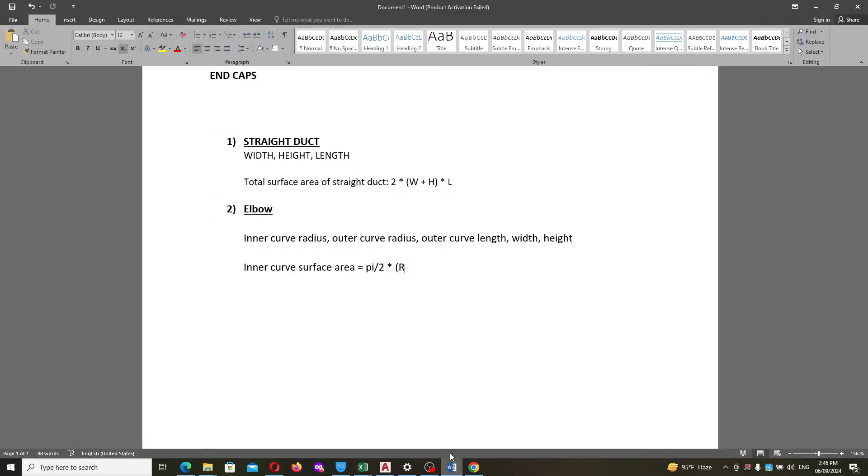So let's get started. First of all, we open the Word file. We will make a new Word file here.

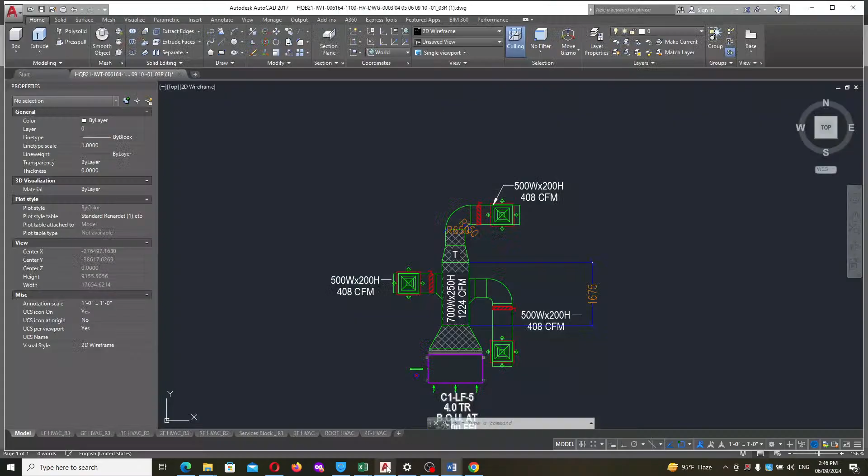Before that, there are many types of ducts in HVAC systems - rectangular, oval and round type, using sheet aluminum or carbon steel in different categories. But today we will focus only on rectangular duct and GI, galvanized iron ducts, because it's the standard normally used in HVAC industry. Other materials like carbon steel and other ferrous materials are used in industrial applications, which we will discuss later.

So you may think, for duct measurement, why are material and these things important? We'll discuss this further in this video, because when choosing the right thickness and choosing the material, we need all these details.

When we go further, we need more details related to SMACNA. We need to get those details from the SMACNA standard to select the duct. Normally in the Gulf area, or I think almost every area, they use the SMACNA standard for HVAC duct.

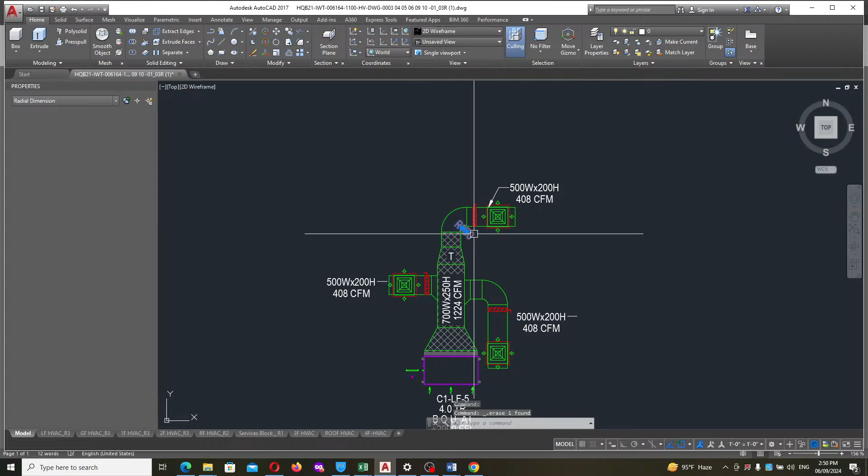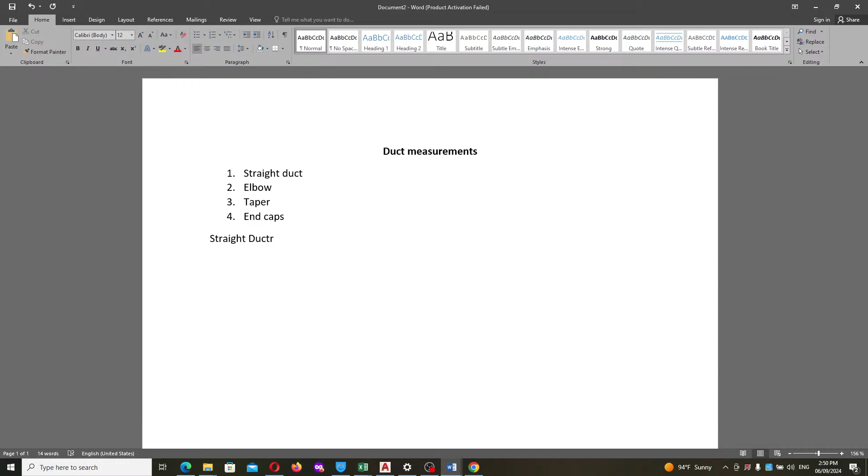So we are going to the Word file. We need now all these equations. First of all, we are going to straight duct. What all details do we need?

We want the width, we want the height to get the straight duct measurement, we want the length. These three things we require to find the straight duct measurements.

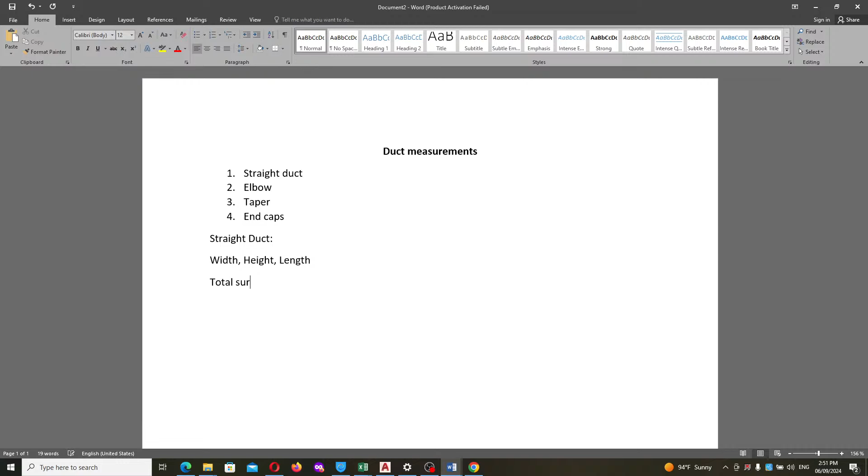So we'll go to the equation. We want the total surface area. So what will be the equation? We need to get the perimeter.

So how do we get the perimeter? We need to put width plus height. So we are able to get perimeter into length. So this is the total surface area equation, the formula for the straight duct.

So next we are going to apply this to the Excel sheet. Before creating a new Excel sheet, we'll go to some template. We'll find some template from MEP Work. We are going to open MEP Work templates.

So here we can find related documents. Here we download the HVAC duct measurement Excel sheet. So we are downloading this.

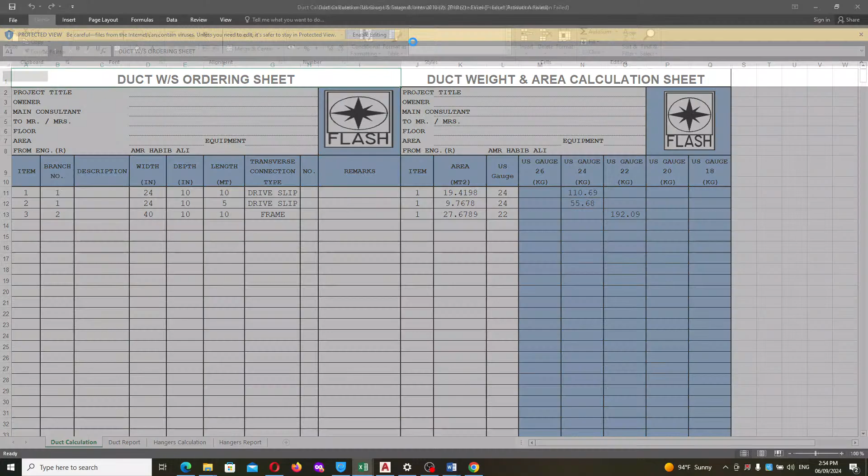So we got the Excel sheet. This Excel sheet I got from mepwork.com. This Excel sheet already has equations and everything - they put their own equations. You can see the depth, width, depth, length, transverse connections, area equations, US gauge selection.

That's why I told you, for this gauge selection we need SMACNA standards, and for the kilogram calculation that's also required. But what I'm doing is we are not using this Excel sheet - we will make our own custom made Excel sheet.

So what we'll do is delete all these things, we don't need this anymore. We just use this template for easy use. So in width I will put in mm - it's currently in inches, we don't need inches, we will use mm only. So leave it, this column we will not repeat.

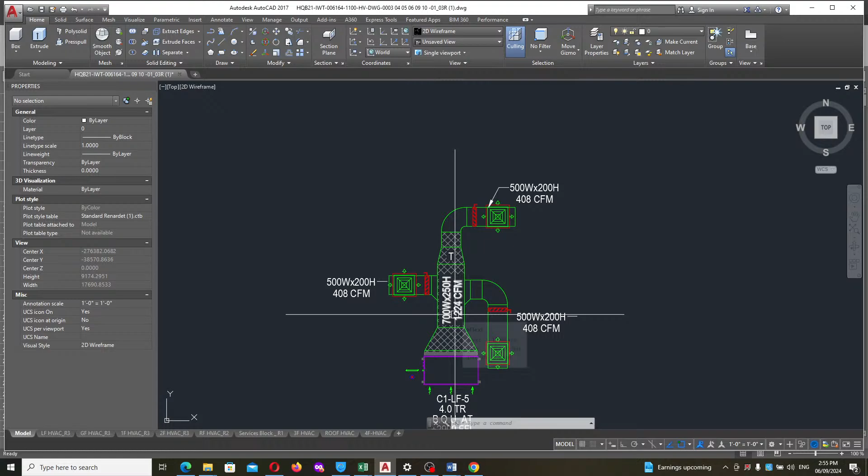So first of all we're discussing the straight duct. We have width 700 and height 250. So I will feed these here, 700 and 250 height. And length we need to take from AutoCAD. How do we take the length? We need to use the command DIM.

When using dim commands, we will get this is the length of the duct, 1675. That I will put here, 1675. So these are we got, these things are we got.

Now we know the equation standard formula. So what is the formula? 2 into width plus height, that into length. So this formula we will put there.

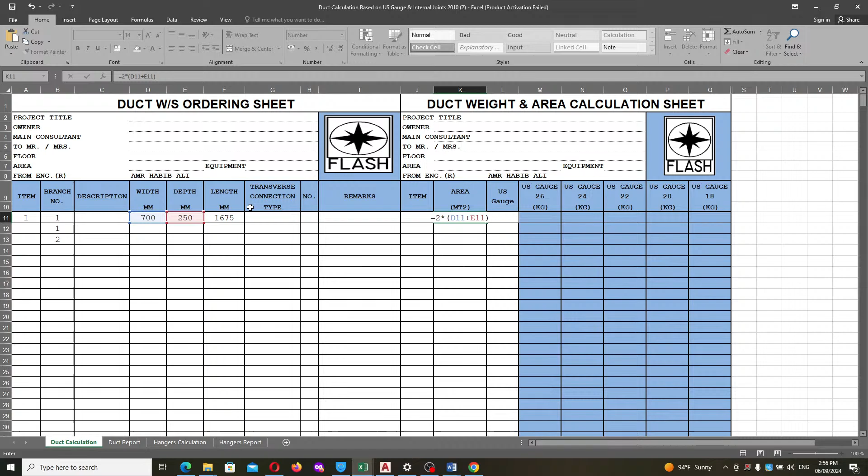So how we will put? We will put equal sign, then we will put 2, then into, then we will put one bracket, then we will select the width row, then we will make plus, then again we select the depth row, then bracket will close, and into we will take the length. So we got a big value.

So we got mm square. But we don't need mm square, we required the area in meter square. So what do we need to do? We make another bracket. We will divide by 1,000,000. So 3.1825 is the area of that straight duct.

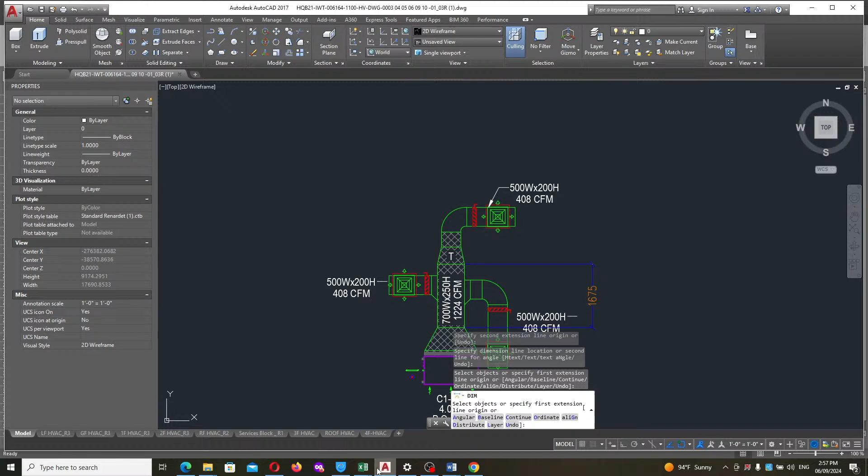So straight duct is very simple, right? So straight edge is very simple. Next, what else? We will go to the elbow. When we go to elbow, it is a little difficult, a little more complicated than straight duct. It's not easy like that.

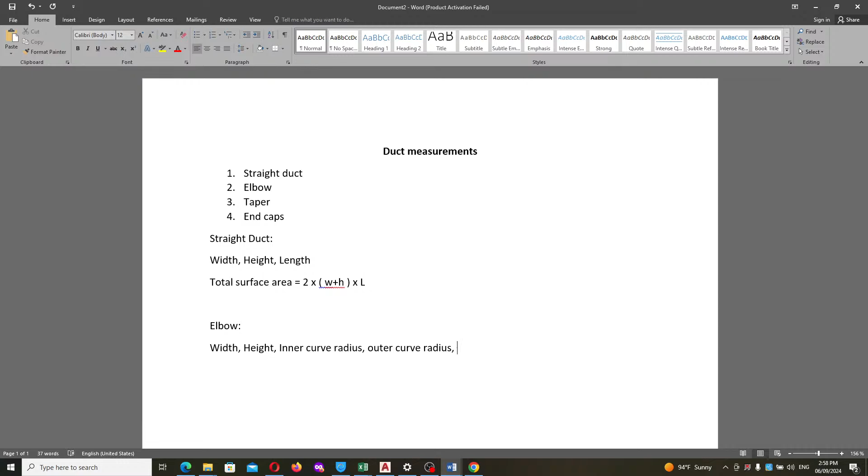How do we find the elbow? So elbow, how we will get it? There are many things you have to add. We need a width, we need a height, we need an inner curve radius, we need an outer curve radius. Then what we need? We need an outer curve length. These things we need for calculating and measuring the elbow.

Maybe you don't understand what is inner curve. I will show you in AutoCAD. In AutoCAD, this is our elbow. This is a 90-degree elbow, horizontal elbow. So in this case, we will tell how to get it. This is the inner curve, this is the outer curve, and this is the outer curve length also. From here to here is the outer curve length. These three things we need to find.

And the width and height we already have here, 500 by 200. So how do we get this? There we use the command dim rad. So we will get the radius. So when we select this, we got the radius. So 150 is the radius of the inner curve.

And what else we need? Outer curve radius we need. So what we need to put? Again we will put dim rad, dim rad, so go select this. We got this one. What is that? 650 is the outer curve radius.

So in this case, we need to make three equations. What is that? One is outer curve surface area, right? Next is inner curve surface area.

Next we need a... okay, next we will discuss. So outer curve surface area, how we get? We need an angle. Outer curve surface area we need to make. How we will make it, I will tell you.

So this is the outer curve surface and the inner curve surface. Here we use pi by 2, because this elbow is a quarter of the circle, so we can use pi by 2 into r outer. Okay, then what else? Into height. So this is the outer curve surface area.

Same we will put here, inner curve surface area. The radius will be inner. So this we got.

Okay, next, we already got this surface area, this surface area. We need this face and the bottom face. So top and bottom face, top and bottom face surface area. So how we will get this?

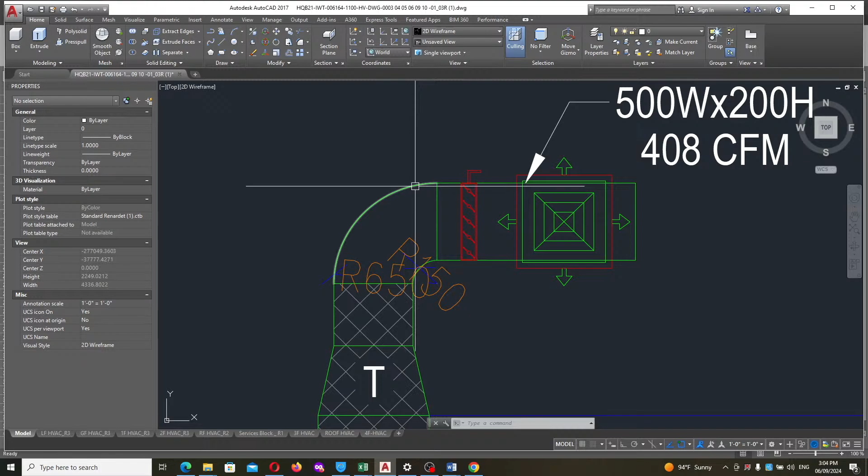So we'll use the length, we will take as the outer curve length. So what I want to do here, in this area we need to get, so we will multiply by 2. Both sides we have upper and bottom, that's why I multiply by 2. Then what we need to do, we want the width, we want the outer curve length, we'll put out. These equations we want to get.

So how do we get outer curve length? Outer curve length, how will you get it? You want to know that also now? Outer curve length we need to get: pi by 2 into r out. So we will get outer curve length.

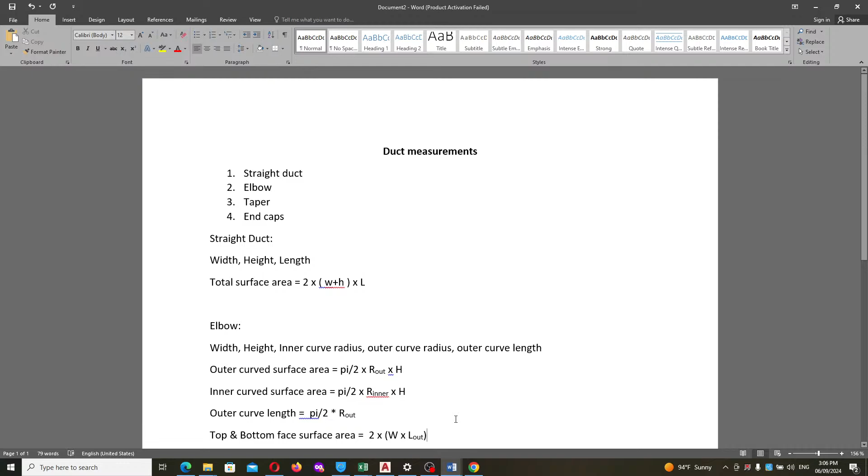So I think it is okay. We'll go to the Excel sheet and make the same Excel sheet.

So next here we put straight, here we put elbow. So what, is the elbow width same? No, elbow width is 500 by 200. That we will add here, 200.

So in this case, what length will we put? We will put outer curve length. But we cannot put that directly, we need to make equations. So no need to put a length directly in the Excel sheet, don't worry, that we will make with equations. So what else?

We need equation for this, we need to make equations. So we will make equations. We will make it equal, and first of all we want to put one bracket. We have the equation here.

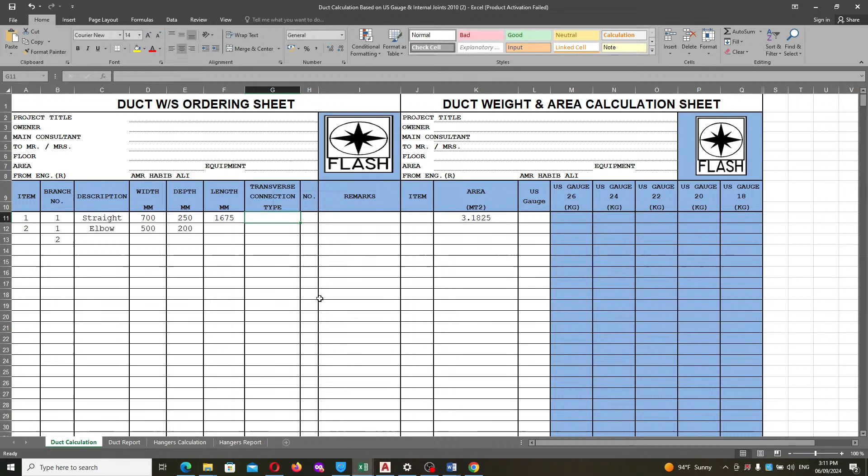Anyway, better we put extra columns. No need, we can put extra columns. So here we will add, this is for elbows only, this is applicable for elbows only. R inner, inner radius, and outer radius. These both things we need.

So for the inner radius, what was that? 150, right? And outer radius 650. So I think we can make the equation.

So now we put pi divided by 2, then we will put into bracket. So first of all we will take the inner radius. So inner, put inner radius. We will put this all in the bracket. This is the equation.

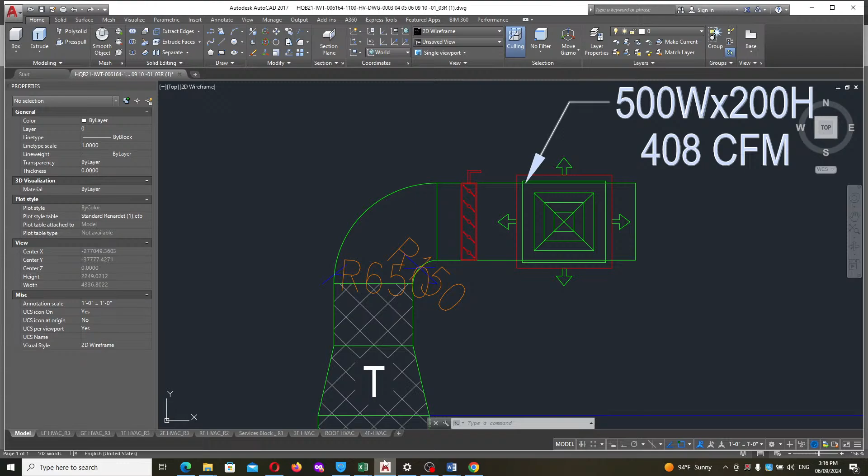So taper, we go here. For taper what all things do we need? We want width 1, width 2, height 1, width 2, height 2 and this length, the slant length. These things we require. So we will go with the average perimeter into this length. That will be the better way to get this.

So how do we get the average perimeter? So what all things do we want? Width 1, then width 2, then height 1, height 2. Then what else do you want? Then slant length we require.

Okay, so how do we get it? How do we get it? These all things you will get from the AutoCAD, right? So average perimeter, the average perimeter we need to get. For that...

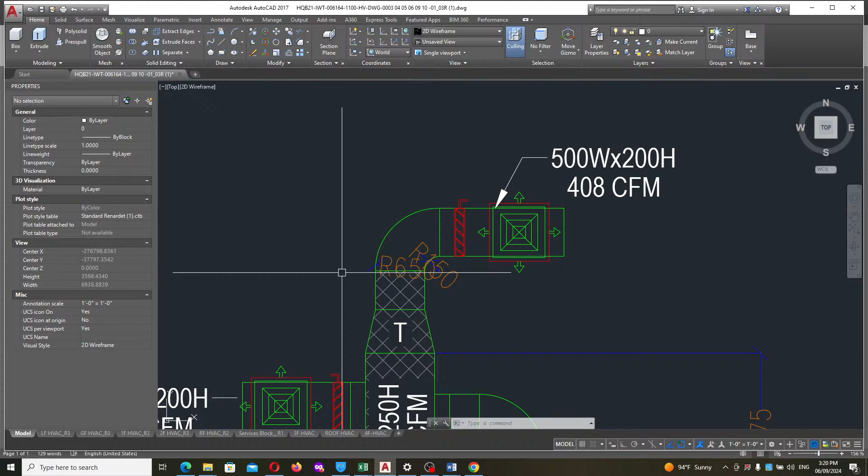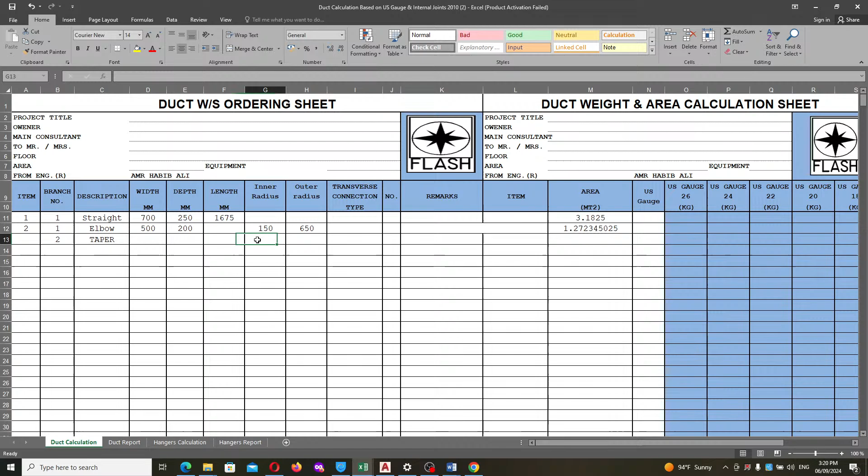These are the things we require to get the taper. So we go to the Excel sheet and make the taper. We know for that we need more columns, so we will make more columns. We'll make another column here, then again another column.

Why? This is width 2, height 2.

So what is width 1, width 2, height 2, height 1? We'll get from here 700 by 250, so we'll put 700 by 250. Width 2 we'll get from AutoCAD, that is 500 by 200, so we put 500 by 200. Right? So these things we got.

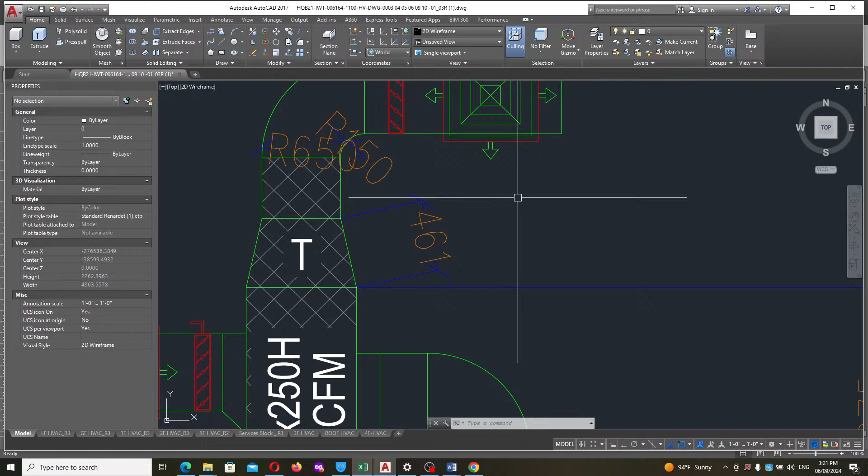So we already have the equations. Length, what will we put? The same length we will put. We got the slant length, right? So slant length we will put, 461. We put 461. So all things we filtered from AutoCAD.

So now we want the equation for the taper, right? So we go to the Word file. We have a taper equation - average perimeter into slant length. That is the total surface area of taper.

So we'll put here: total surface area of taper equal to average perimeter into... we'll put length into slant length. So this is the way to get a taper.

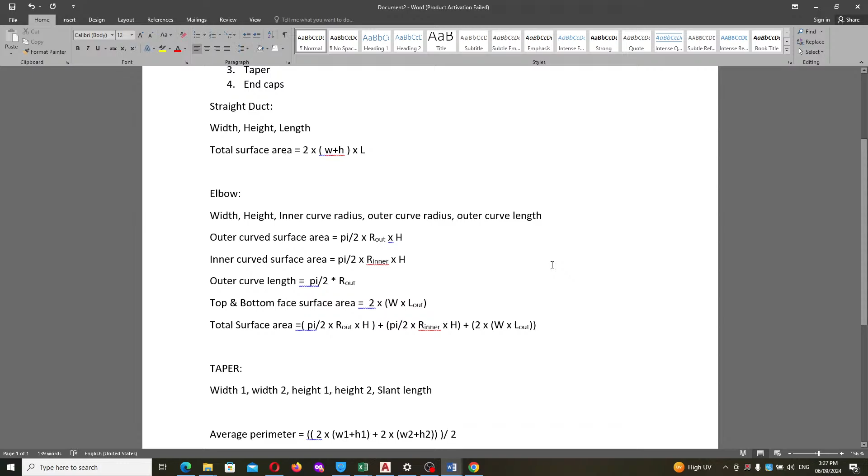Now I am stopping. I've given you a small introduction, and I think I've made you understand how to make this Excel sheet and how we calculated elbow, tapers, end caps and straight ducts - all equations. I think now you know everything, right? These things we have already discussed - straight ducts, elbow, tapers, end caps.

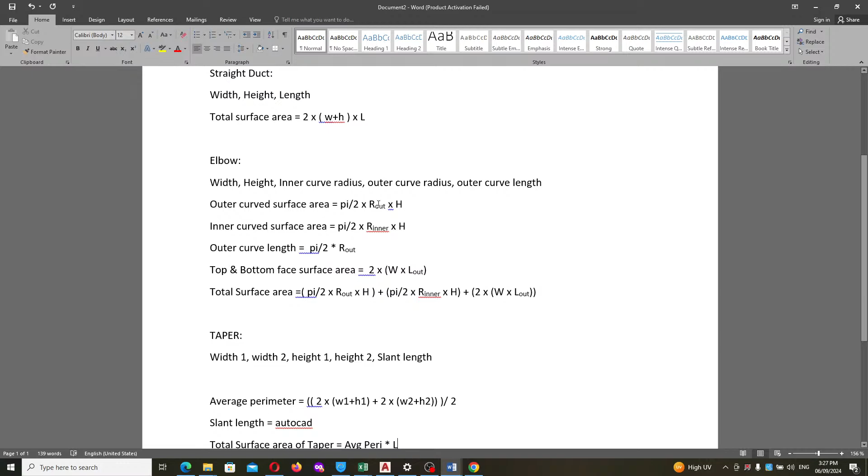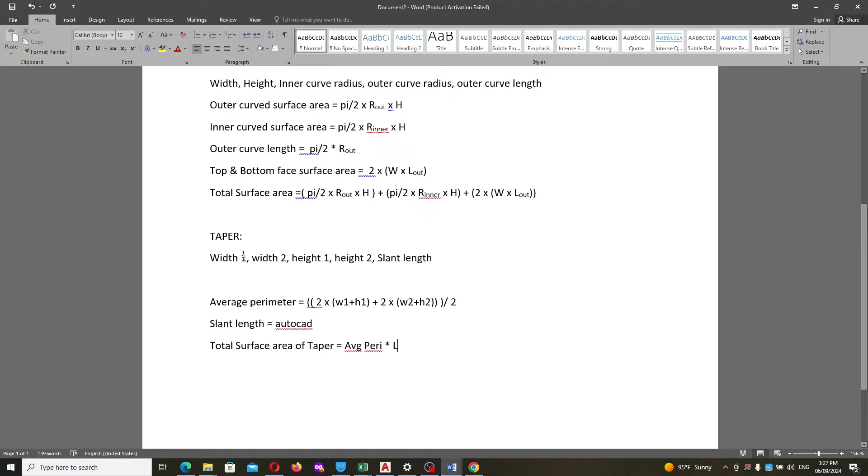For straight ducts we discussed total surface area and how we calculated it. We also discussed elbow - what all things were required - outer curve surface discussed, inner curve surface area, outer curve length how to take, and from these all things how total surface area was calculated, and how we calculate taper. All these things we already discussed, right?